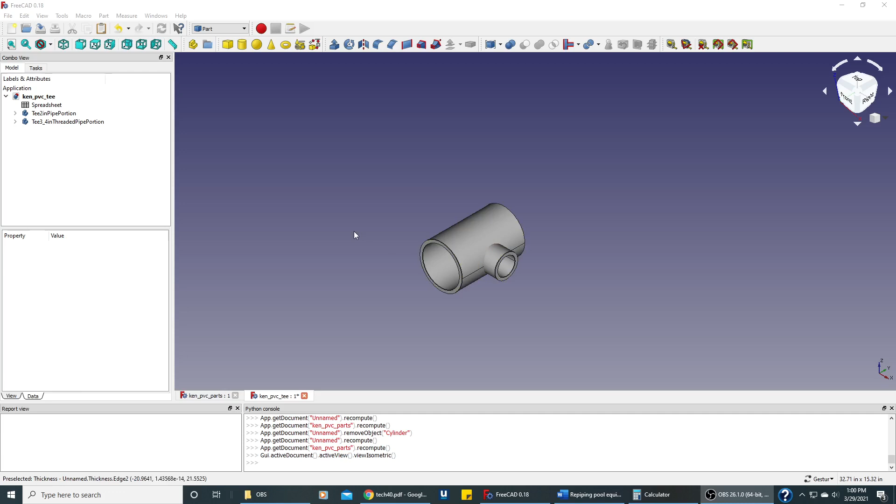Okay, so I've created these two pieces of pipe, which you should already know how to do. We're going to do one other thing: we're going to create a cylinder. Let me click on this cylinder icon right here, and you can see it created a tiny cylinder in there.

Let's hide these other parts here a minute, and let's deal with this cylinder. We're going to make it 6 inches long, and the radius is going to be the inner radius of a 2-inch socket. You'll understand why in a little bit.

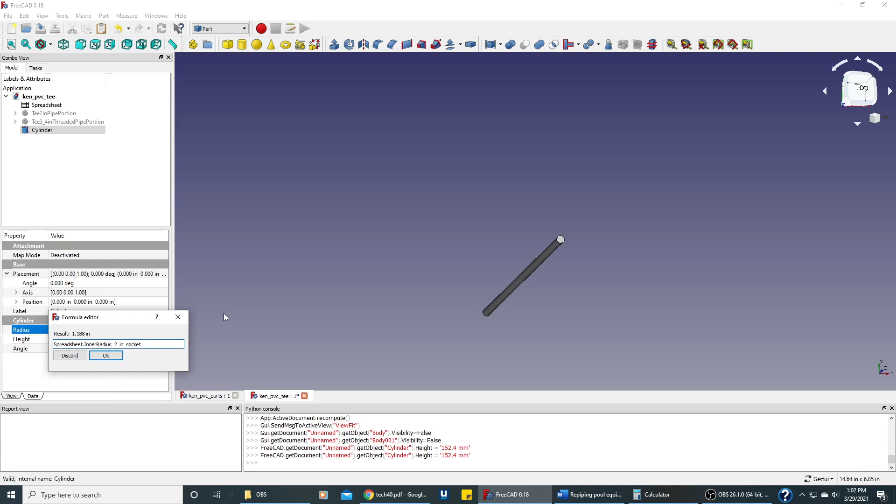Let's unhide these other objects. What we really want to do eventually is slide this cylinder inside of this other object, but more on that later.

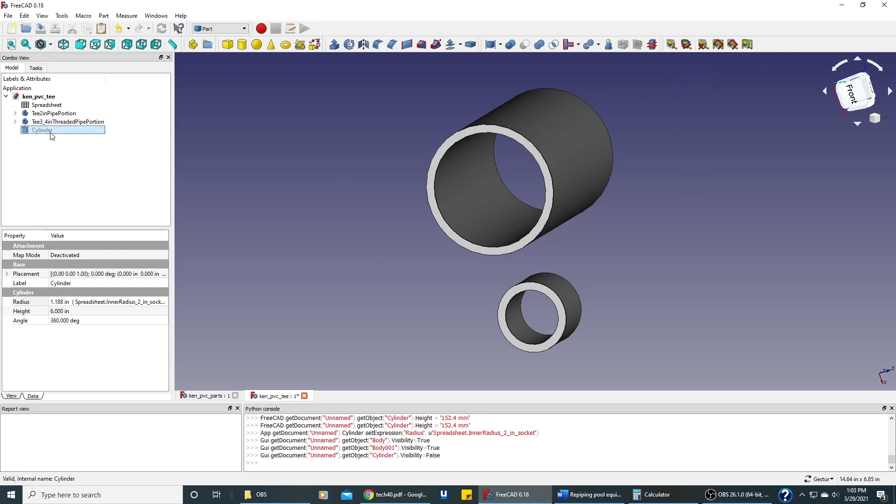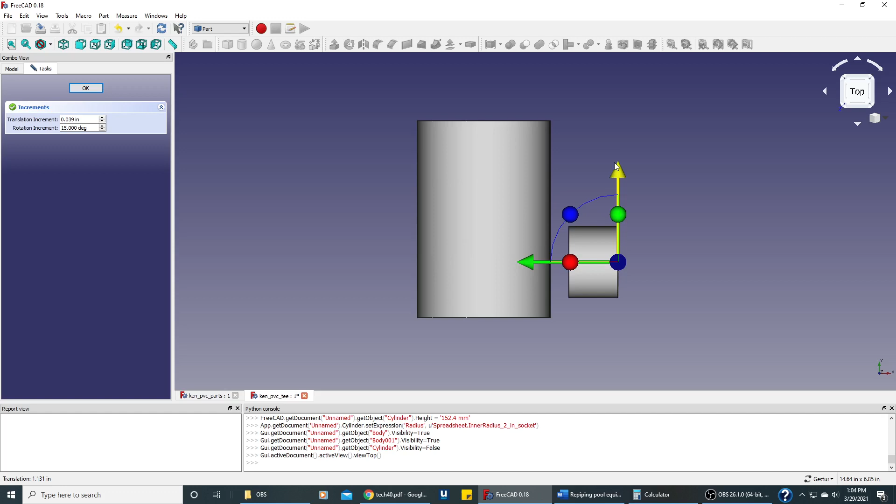Let's hide the cylinder, and let's go to not the front view, but this view right here, the top view. We want to rotate this around and slide it over into this pipe. So let's take our threaded pipe portion, let's start transforming it. We will rotate it, and we'll start sliding it into the correct position.

We could be extremely accurate on this if we wanted to, but I don't want to be that accurate. You're going to get the idea. So let's see if this looks good. Looking good, it's maybe not centered exactly. If I did this, we might want to slide it over a bit more, but I'm not going to worry about that for right now.

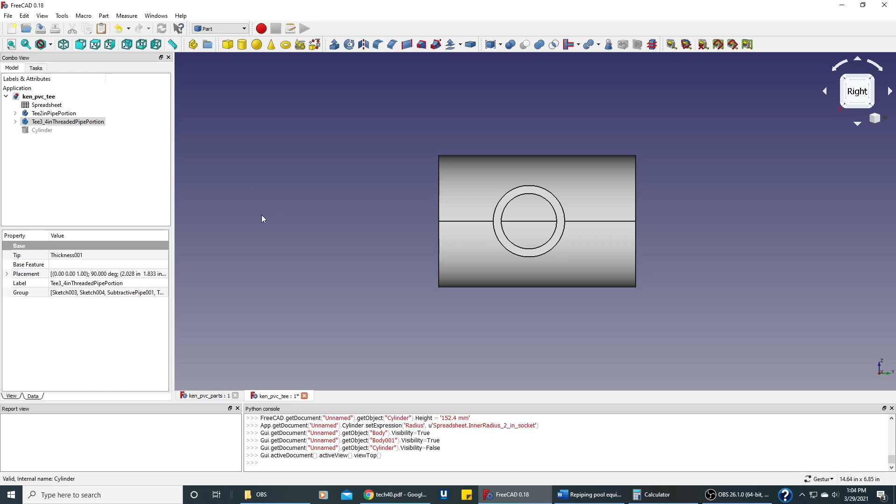The one little issue that we probably have is we've got these pieces inside here that we don't really want. For our purposes, for my diagram, it wouldn't matter if I left them in there, but if you were trying to print this on a 3D printer, you can't have these in there. You got to get rid of them, and that's where the cylinder is going to come into play.

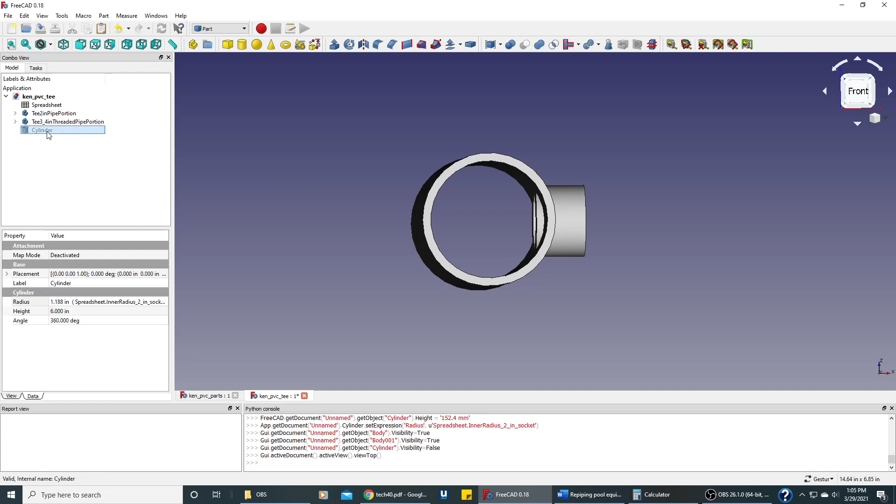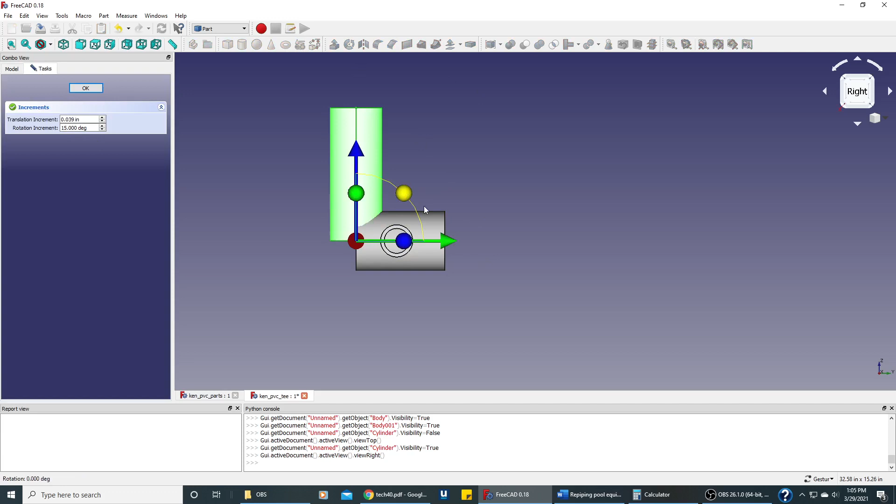So we want to get this cylinder inside of this pipe, and let's figure out a view that will help us do that. We can see we want to rotate this cylinder so we can slide it in there. So let's pick the cylinder, let's transform it, let's rotate it this direction, and let's slide it in a bit, and let's take a look and see what we've got so far.

And it's not looking too bad. If we go to the front view, you can see that it's fitting in there pretty good.

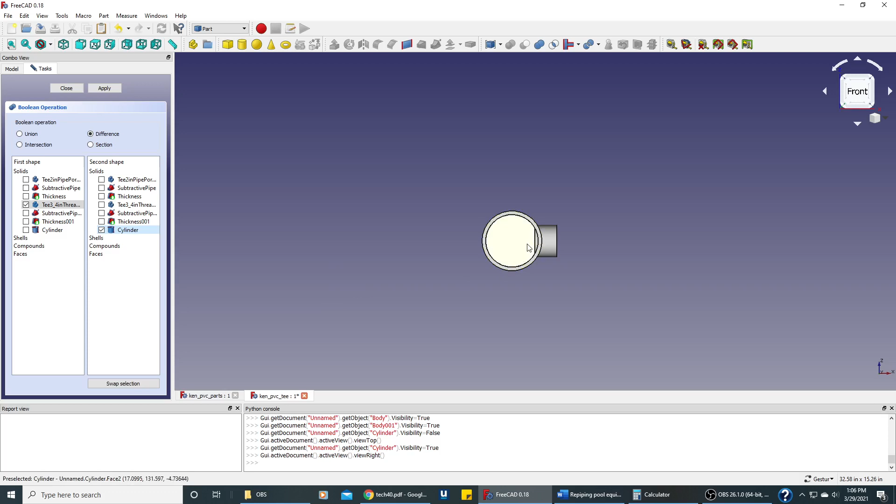And now what we want to do is get rid of this little tiny piece of pipe in there, and the way we're going to do that is to select this threaded portion and go up here where we can work with pieces, and we're going to subtract. We're going to use the difference. We're going to subtract the cylinder, so wherever these things intersect, we're going to subtract that piece out of it. So let's do that.

And let's close this, and let's see what we got right now. So that's looking a lot better.

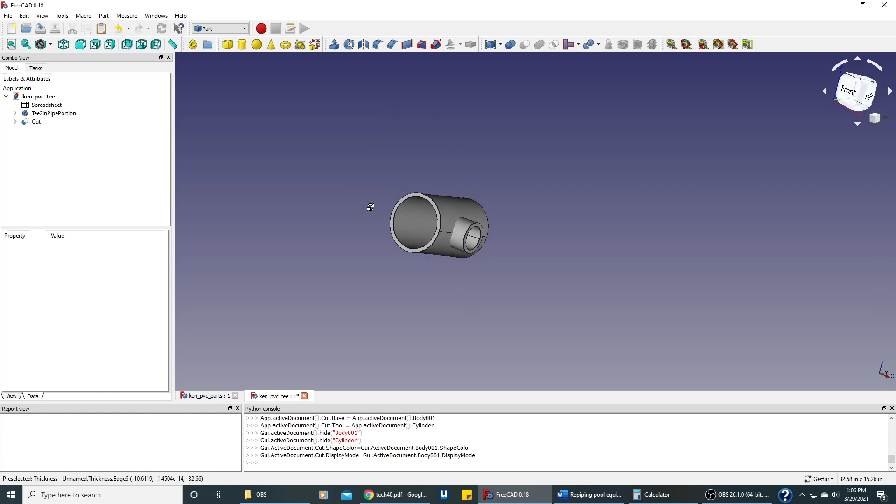Now there's still going to be some stuff in here. If we really wanted to get rid of this portion here, we'd have to do a similar thing by sliding a smaller cylinder in here and subtracting it from this pipe. But I don't care, we're not going to do that. This is good enough for us.

And also, this is going to be threaded pipe, and there's videos on YouTube and other places that show you how to make threads. I may come back and do that eventually, but for right now this looks like a pretty good tee.

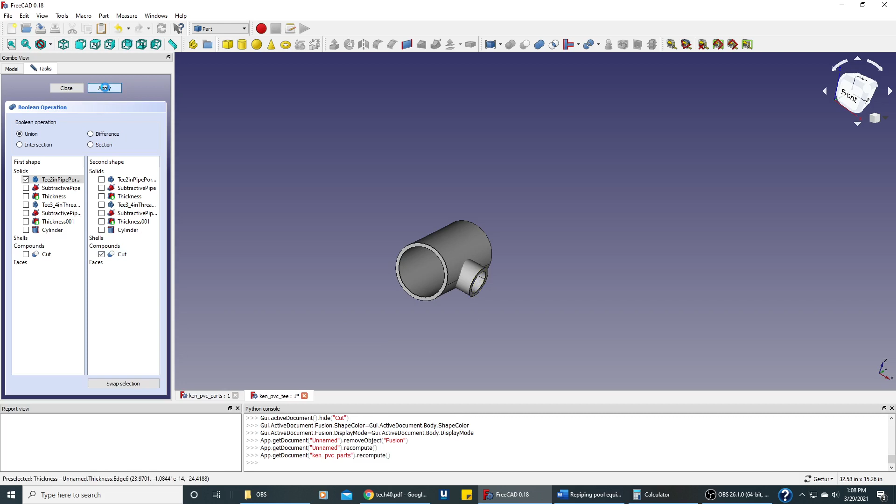The only last thing we have to do is to combine this all into one object. So let's do that. We'll select the tee, this portion right here, and we'll go into the icon here where we can work with multiple objects and subtract them and intersection and such. So we'll take this and unite it with the cut that we just made, which is actually that piece in here, and we'll apply it, close this down, and now we have the fusion, which is the entire thing.

We'll rename that in a minute. If we transform it, you'll see that the whole thing moves, so now it's one object. And we'll just rename this to the tee.